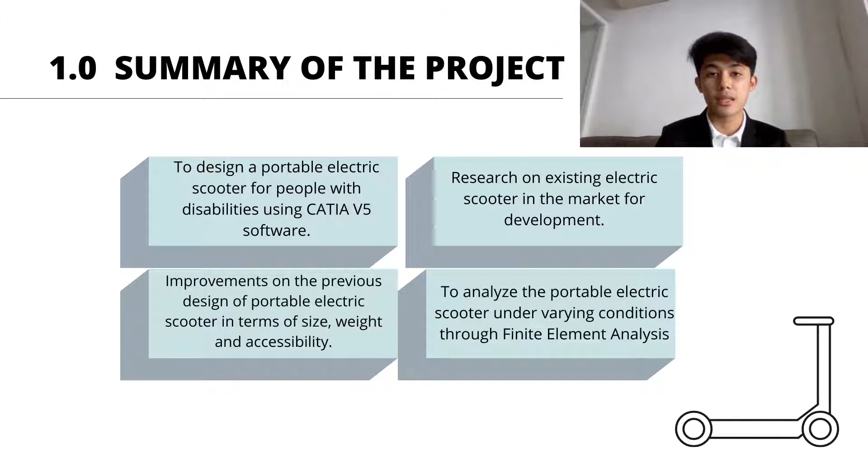The summary of the project is to design a portable electric scooter for people with disabilities using CATIA software. Research is being done on current existing electric scooters in the market for development, with improvements on the previous design in terms of size, weight, accessibility, and practicality for people with disabilities. The last objective is to analyze the portable electric scooter under varying conditions through finite element analysis.

For the introduction, electric scooter is a clean mode of transportation introduced to minimize the amount of carbon emitted to the environment. Electric scooters have been introduced in the United States, not just in the realm of transportation, but also as a contributor to outdoor activity preferences.

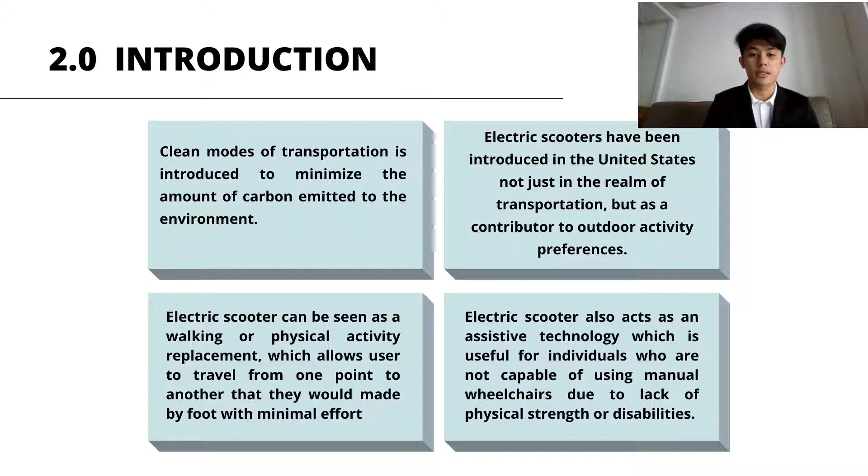Electric scooters can also be seen as a walking or physical activity replacement, allowing users to travel from one point to another with minimal effort. Electric scooters also act as an assistive technology, useful for individuals who are not capable of using manual wheelchairs due to lack of physical strength and disabilities.

For the literature review, electric bikes and scooters: electric scooters are plug-in vehicles with 2 or 3 wheels powered by batteries. Electricity is stored in the rechargeable battery which drives the motor to produce rotational motion in the tires. Electric scooters are classy in design and easy to operate, which is convenient for traveling.

There are many types of electric scooters such as kickstart electric scooter, foldable electric scooter, three-wheel electric scooter, mopeds, and many more. Materials usually used for their frames are carbon fiber, titanium, and steel, which makes the electric scooter lighter and stronger.

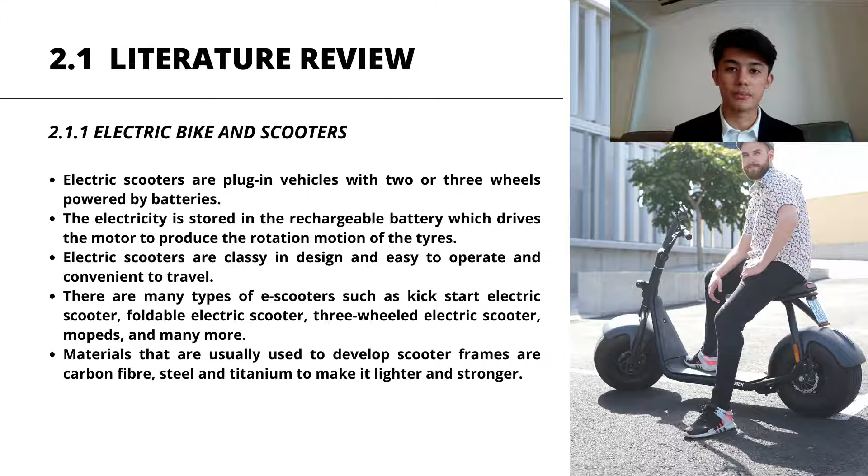The second literature review is electric scooters as daily transport. Technological developments in electric vehicles have made electric scooters an alternative with great potential to substitute the actual form of transport in urban areas. The main manufacturing and production comes from China, but now many markets in Europe have been developed.

Countries such as France, Germany, and Denmark are starting to adapt electric scooters as a replacement for motorcycles. Meanwhile, Asian countries like Malaysia, Singapore, and Indonesia have banned electric scooters from being used on public roads unless regulated under the Road Transport Amendment.

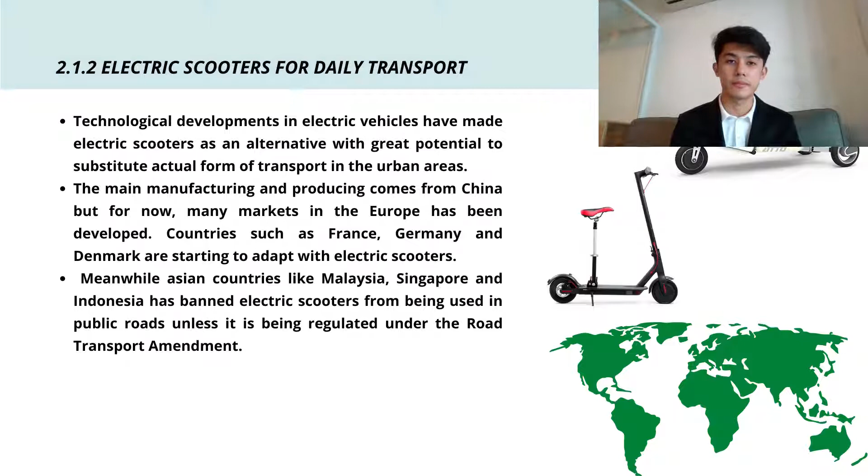Let's go into more detail about the foldable two-wheel electric vehicle. A foldable electric scooter is a scooter that can be folded where the handlebar stem meets the deck. Some foldable scooter designs allow one or two wheels to remain on the floor, making it easier for a person to push or pull when carrying it along.

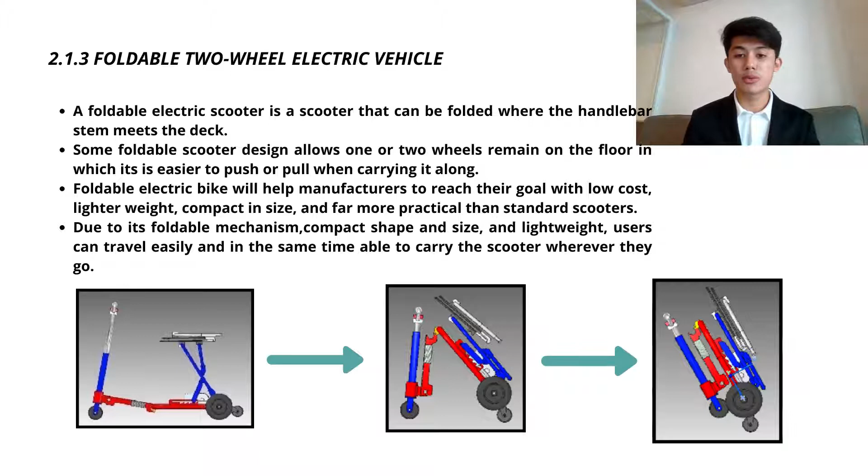Foldable electric bikes help manufacturers reach their goal with low cost, lighter weight, compact size, and far more practicality than standard scooters. Due to its foldable mechanism and compact, lightweight shape, users can travel easily while being able to carry their scooter wherever they go.

These are the crucial parts of an example foldable electric scooter. First, we have the foldable seat, and secondly the foldable handlebar stem, which meets the footrest when folded. There are additional wheels at the rear so it is easy to push and pull when folded, along with the electrical motor that drives the tires, and the battery charger.

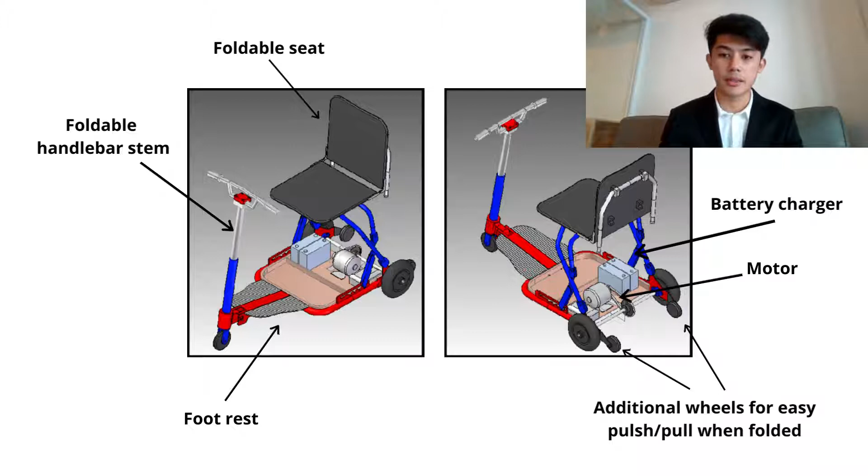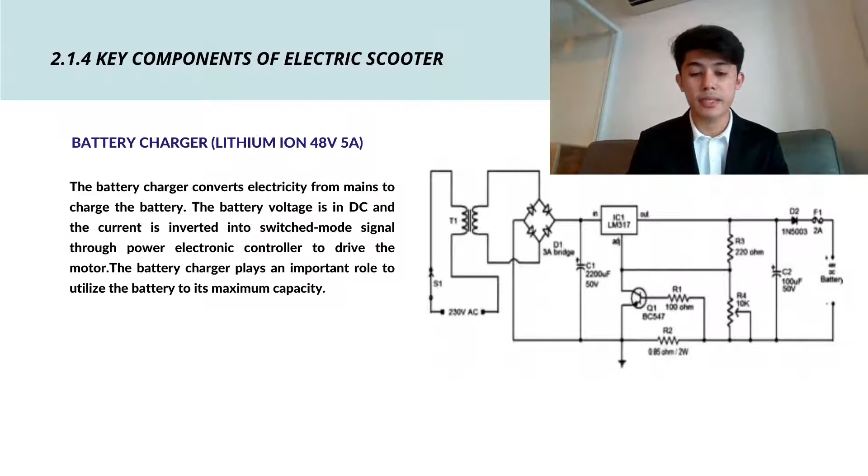For the last literature review, I will explain the key components of the electric scooter. First, we have the battery charger, which uses a lithium-ion battery, 48 volts and 5 amperes. The battery charger converts electricity from mains to charge the battery. The battery voltage is in direct current DC, and the current is inverted into a switch mode signal through a power electronic controller to drive the motor. The battery charger plays an important role in utilizing the battery to its maximum capacity.

The second component is the batteries, which store electrical energy allowing the motor of the electric scooter to run. In this project, lithium-ion battery is chosen because it is the most efficient for an electric scooter, offering high density while remaining lightweight and compact in size.

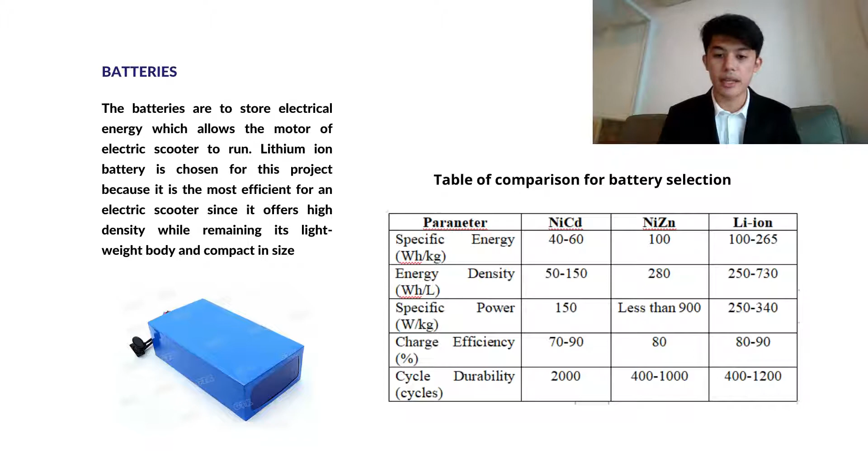The next component is the brushless DC motor. It is powered by direct current and has an electronic control communication system which synchronizes with the electric motor. In this process, current and torque, voltage and RPM are related linearly.

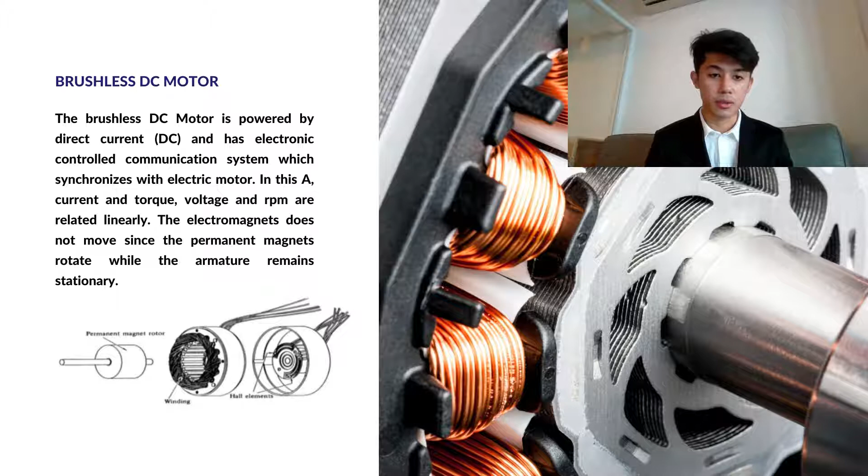The electromagnets do not move since the permanent magnets rotate while the armature remains stationary. The figure below shows the parts of the brushless DC motor, where we have the permanent magnet rotor, the windings, and the Hall elements.

The other component is the motor controller. The motor controller functions to serve the performance of the electric motor in a predetermined manner. It includes an automatic or manual means to start and stop the electric motor by selecting and regulating the speed and torque, and to protect from overload and faults. The motor controller controls the functional capabilities and is also determined as the central component of the system.

Lastly is the DC to DC controller. This is an electrical power converter device used to convert a source of direct current from one voltage level to another by storing the temporary input. The energy is then released to the output at a different voltage. The storage can be either in magnetic field or electric field storage components. This power converter device can be designed to transfer power from input to output in only one direction.

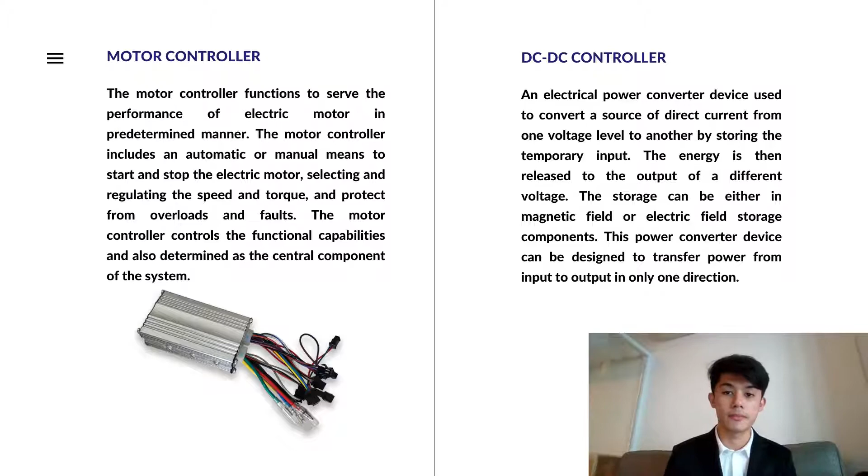And what if anything happens? What if the scooter breaks down? It is very hard for them to push the electric scooter since it is too big and heavy.

There are two main objectives of this project. Firstly, to develop an electric scooter that suits people with disabilities. The second is to analyze the performance of the portable electric scooter under varying conditions through finite element analysis.

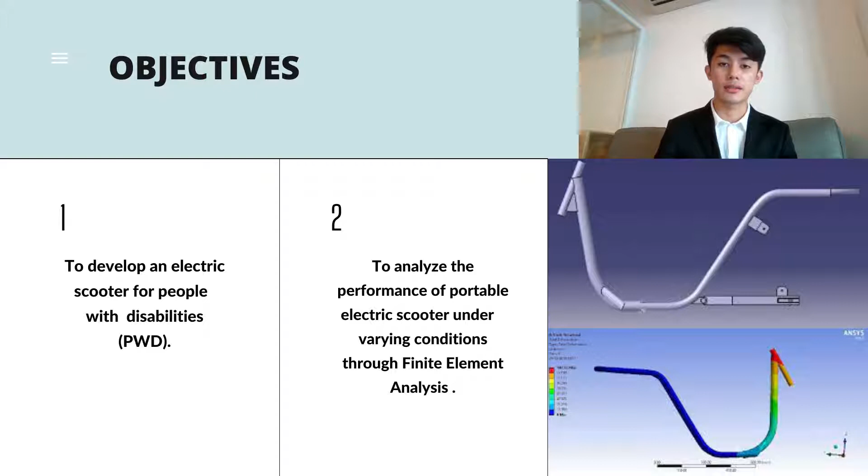The scope of this project is to design and develop a portable electric scooter for people with disabilities using CATIA software and finite element analysis.

A 3D portable electric scooter will be redesigned from the previous design, and finite element analysis will be applied on the main parts of the model to predict how it behaves under certain conditions such as load and weight acting on the material under boundary conditions, in order to determine the crucial parts of the model which contribute the most to the least strength, before it goes through a series of result analysis and modifications.

Improvements to the electric scooter model design will be done, if there are any, before being analyzed using the same model and boundary conditions to finalize the design.

For the methodology of this project, the project is focused on fulfilling the objective, which is developing the prototype design of the portable electric scooter using CATIA software.

After producing the CAD model, finite element analysis is performed using CATIA software or ANSYS to predict the structural behavior of the portable electric scooter under boundary conditions when exerted on the model. Analysis is performed to check the validity of the design component.

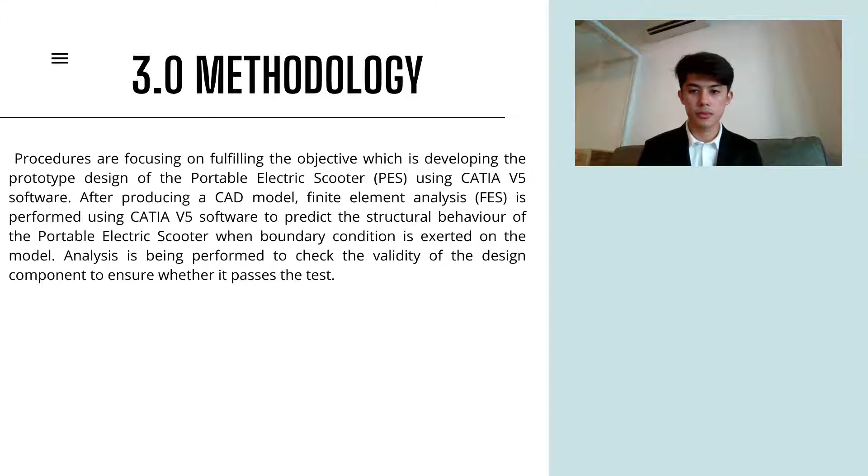So these are the flowchart of final year project 1. At first, analysis of the previous electric scooter design, followed by design development using CAD software. In this project, I am using CATIA software to develop a new design of the portable electric scooter to make it more lightweight and more practical.

After that, design evaluation and comparison between the previous model of electric scooter and the new model is done. The next one is preliminary CAD design and simulation, followed by detailed CAD design and simulation. If the design is acceptable, it will go through finite element analysis and motion simulation, and if the result is acceptable, the project is being done.

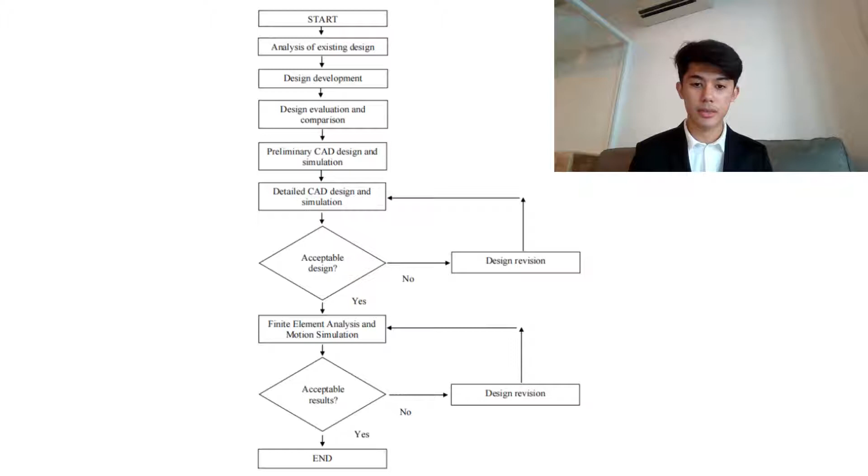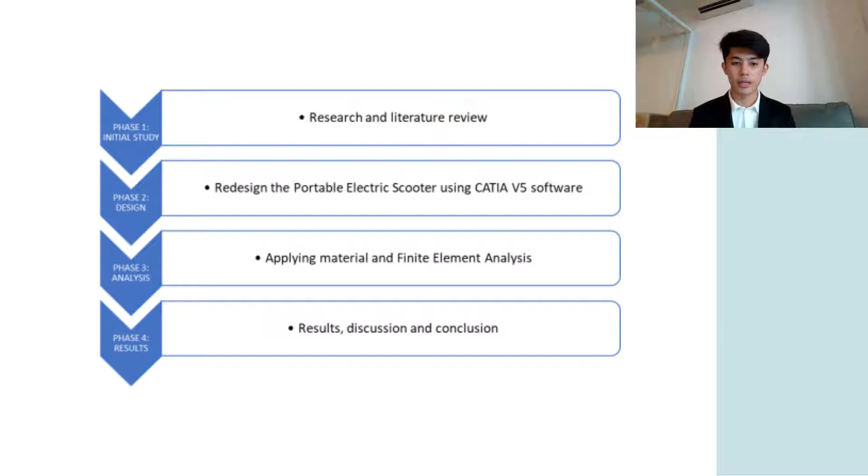So these are the rough flow chart of this project for this semester. At first, the first phase is the initial study on research and literature review. The second is phase 2, redesigning the portable electric scooter using CATIA software based on the existing electric scooter design. The third phase is applying material and finite element analysis on the electric scooter design. The last phase is results, discussion, and conclusion of this project.

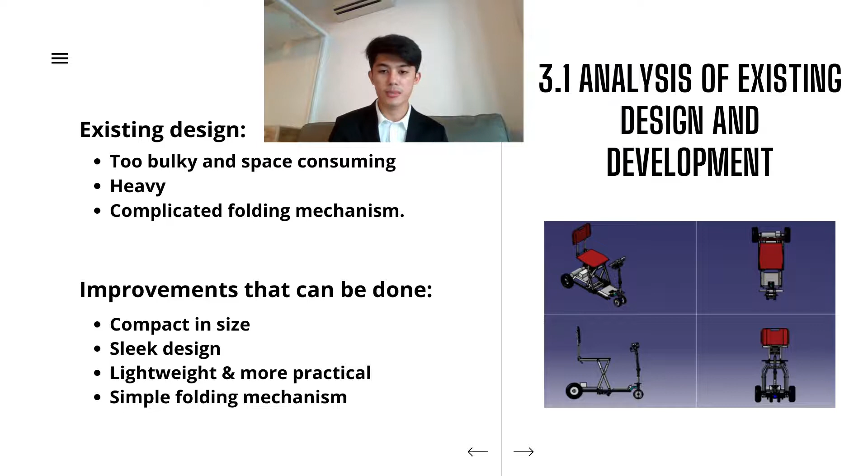So in this project, a few improvements can be done for the electric scooter, such as making it compact in size, smaller in shape, with a sleeker design to increase aesthetic value, more lightweight and more practical. This applies to the application of material, using maybe titanium or carbon fiber to make it lighter, and making it a simple folding mechanism for people with disabilities.

So for the design evaluation process, CAD modeling is used to accomplish preliminary designs and layouts, design details of 3D models, part assemblies, and releasing drawings. The existing design has been migrated from step file into the CATIA V5 software to obtain a proper dimension of the electric scooter. After gaining the proper dimensions, each part of the portable electric scooter is redesigned and remodeled in CATIA software. The previous electric scooter will be made for benchmarking.

For the next step is finite element analysis. Finite element analysis is a computerized method to predict how a product behaves when real forces, vibration, heat, stress and strain, and other physical boundaries are exerted onto the product design. It shows whether a product can sustain the physical boundaries or they will break.

The 3D design of the model will go through finite element analysis, and mesh will be generated from the ANSYS software. It will show the boundary conditions and forces applied to each configuration with respect to the actual force applied on each configuration to simulate the stress and strain.

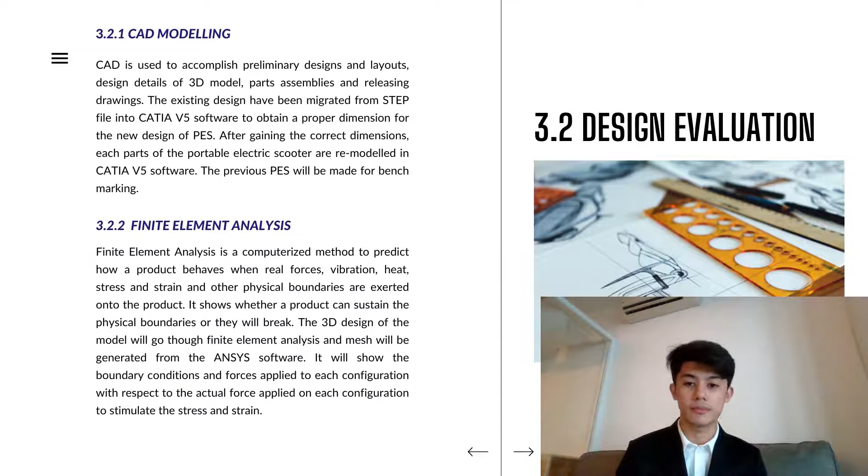Okay, for the results, these are the previous portable electric scooter designs from past semesters. As we can see, there are too many parts on the electric scooter, which makes it bigger in size, bulky, and it looks more complicated when it comes to the folding mechanism.

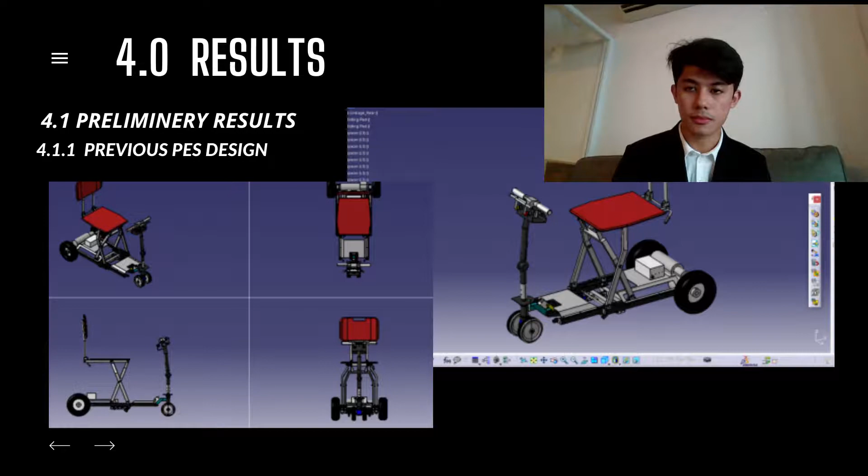So this is my preliminary design of the portable electric scooter. My goal is to design a scooter that is lightweight, very simple, and sleeker in design, and which suits the requirement of a disabled person.

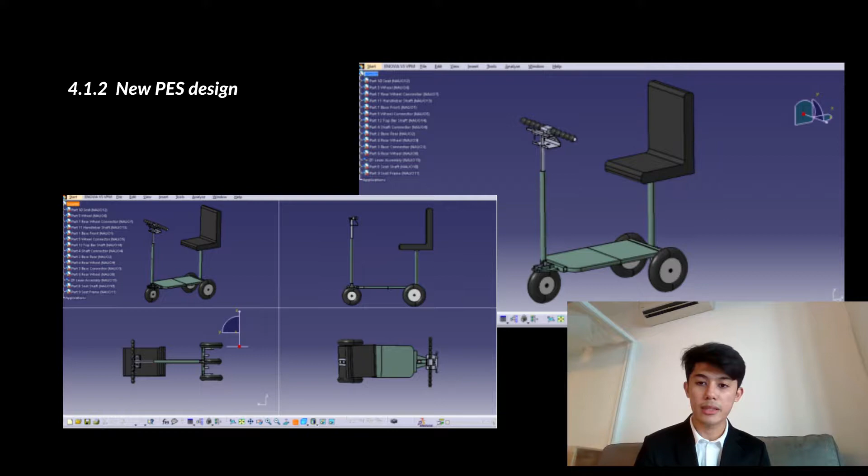So in this project, this scooter is lightweight, and even though it is just as simple as that, it is very suitable for people with disabilities in bringing their scooters along. For example, if they reach their destination, they can simply fold their scooter into a small shape and bring it together with them. There's still a lot of improvements that can be done towards this new design, such as redesigning the seat to make it more ergonomic and making a simpler folding mechanism for people with disabilities.

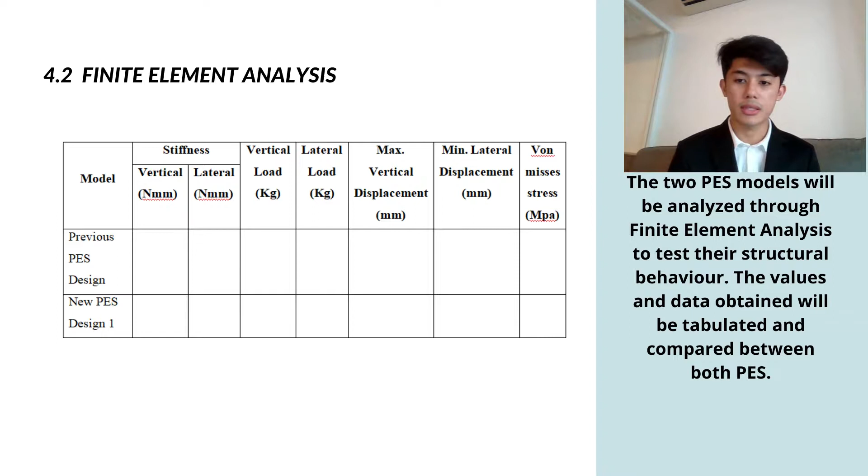So for the finite element analysis process, the two portable electric scooter models, the previous design and my design, will be analyzed through finite element analysis to test their structural behavior. The values and data obtained will be tabulated and compared between both of the portable electric scooters. This process will be done in next semester in final year project 2.